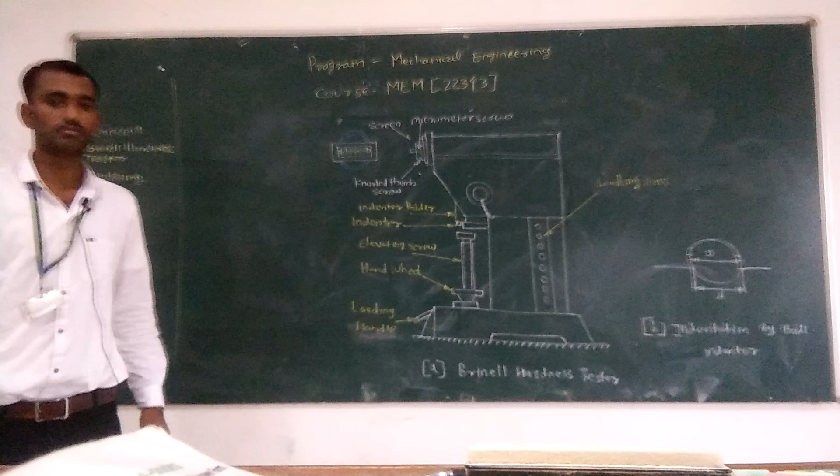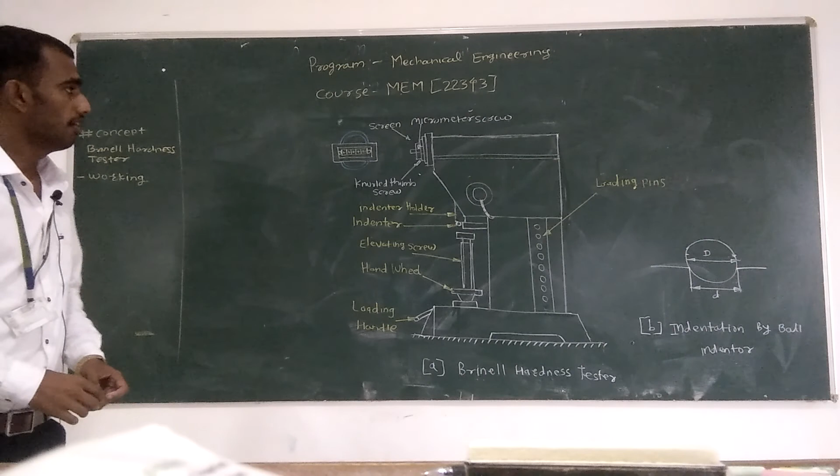In today's lecture, we are going to learn Brinell hardness tester and their working. As we know, there is one important property, that is hardness, which is a mechanical property. So, what is hardness? Hardness is nothing but a resistance of the material to penetration.

Means if you are going to conduct the hardness test, some indentations are created by using balls. So resistance to that penetration is nothing but hardness.

So what we are going to do in hardness test, a tool with particular geometry with mechanical properties is enforced in the surface of the specimen, which is either circular or conical, spherical in shape.

Suppose this ball is impacted on the surface of the specimen, then it will create some indentation on the specimen, and by measuring the diameter of that indentation, we can measure the hardness.

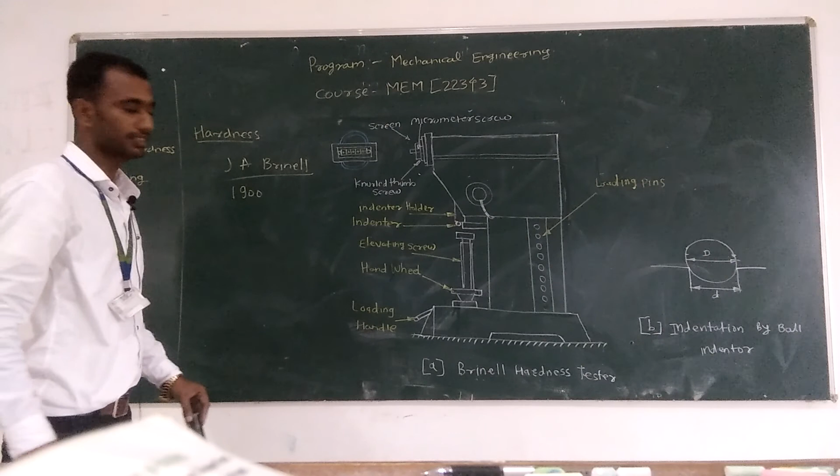According to this scientist, we are going to use the ball of materials steel, hardened steel, or carbide, having dimension 10 mm in diameter. The material of the indenter is made up of hardened steel or carbide, and diameter of that indenter is 10 mm.

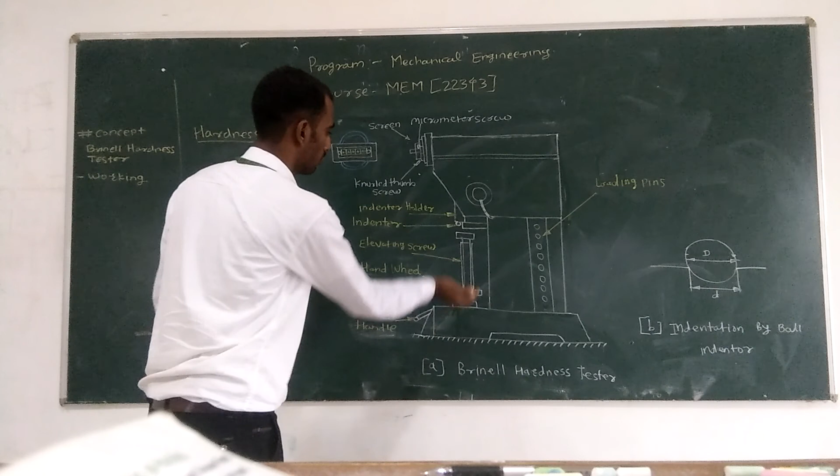Next procedure is that by using this loading handle, we can apply the load or adjust this arrangement, and lift the specimen in upward direction. Now, the load is applied hydraulically or by using mechanical devices. We can use them and apply the load on the surface of the specimen.

Now, after applying the load, we get an impact on the surface of the specimen in terms of indentation like this. This is just because of impact of the bottom surface of that indenter. Suppose this is the diameter of that indenter, capital D, and the impact diameter is taken as small d.

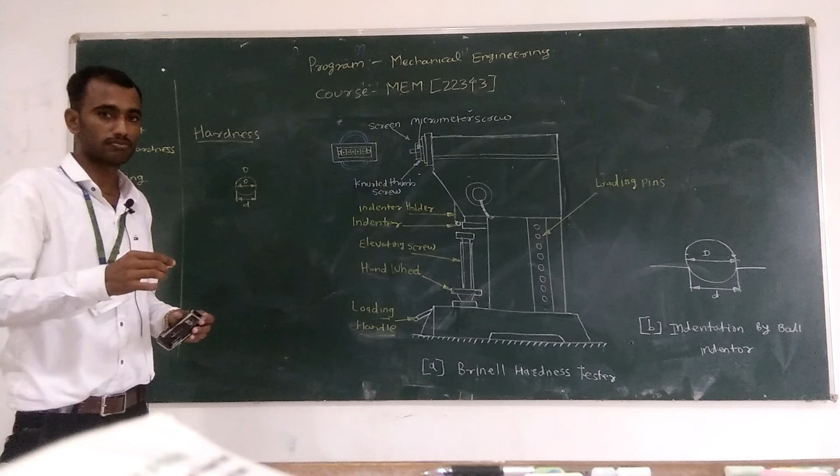Now, the hardness of that specimen can be measured by a mathematical formula. That is BHN equals applied load P divided by (πD/2)(D minus the square root of D squared minus d squared), where BHN is nothing but Brinell hardness number.

This is the unit of hardness. P is applied load in kilogram. And this is area, and the area is in millimeter square.

So, where capital D is equal to the diameter of the ball indenter, small d is the indentation dimension. After the impact, whatever diameter is measured is denoted by small d. By putting in the value of the applied load as well as the diameter of the ball and the indentation diameter, we can calculate the Brinell hardness number, or hardness, of that particular specimen.

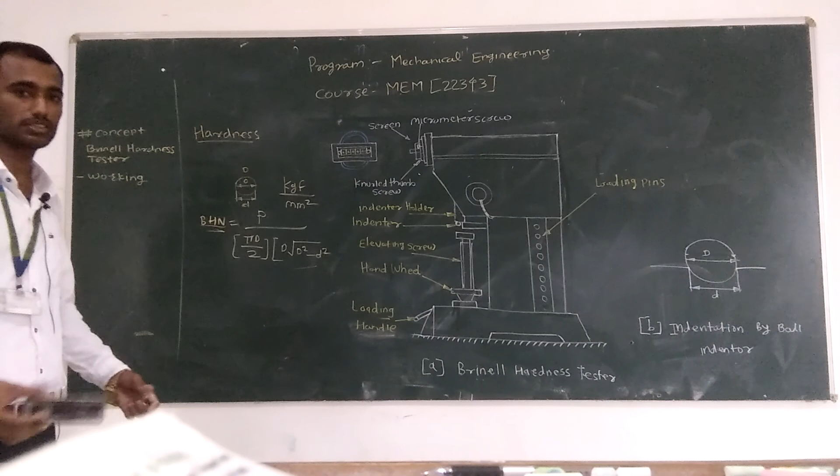This is all about the working of the Brinell hardness tester. Now, we are going to discuss the advantages and disadvantages of Brinell hardness testing.

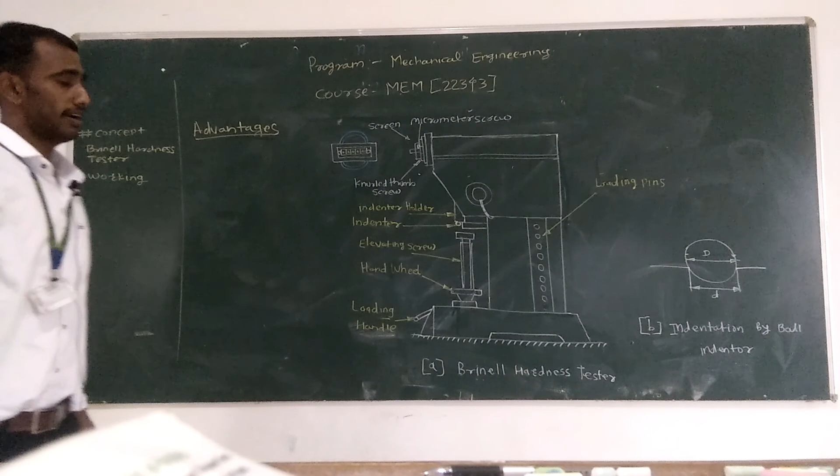As the diameter of the ball indenter is so large, that is 10 mm, and some materials have heterogeneous compositions, their hardness changes from point to point. Suppose this is a specimen, and we consider points on the surface: 1, 2, 3, 4. Suppose this is a heterogeneous specimen; because of that heterogeneous composition, the hardness of the specimen will vary from point to point.

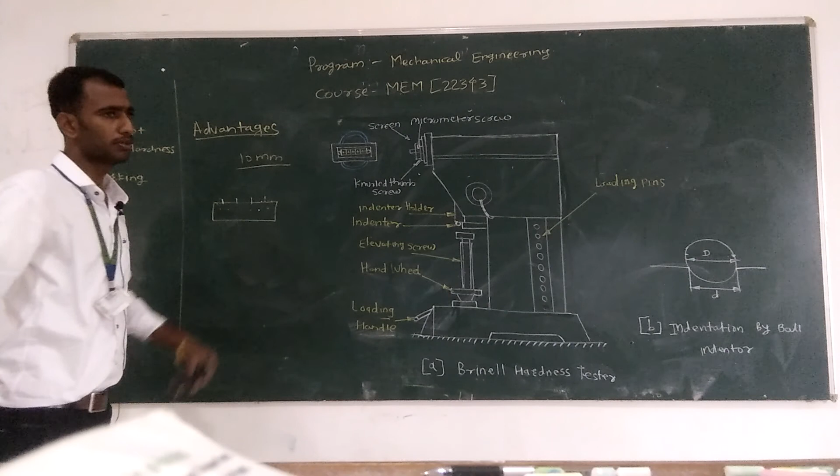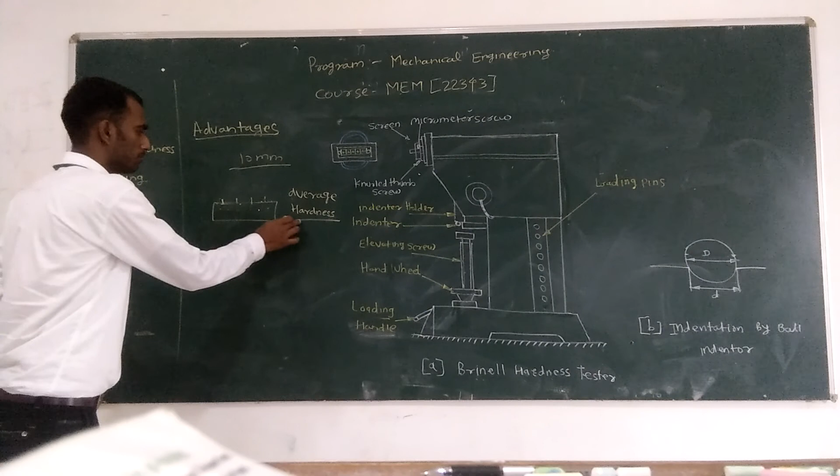So, because of the large diameter of the indenter, whatever hardness is calculated by that indenter is the average hardness. That means there is no impact on the accuracy of the hardness measurement. Even if the hardness changes from point to point, there will be no impact. This is the advantage of the Brinell hardness test.

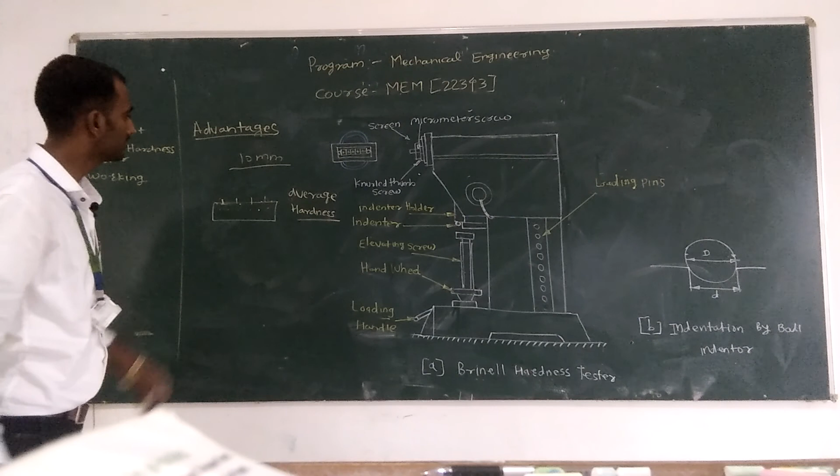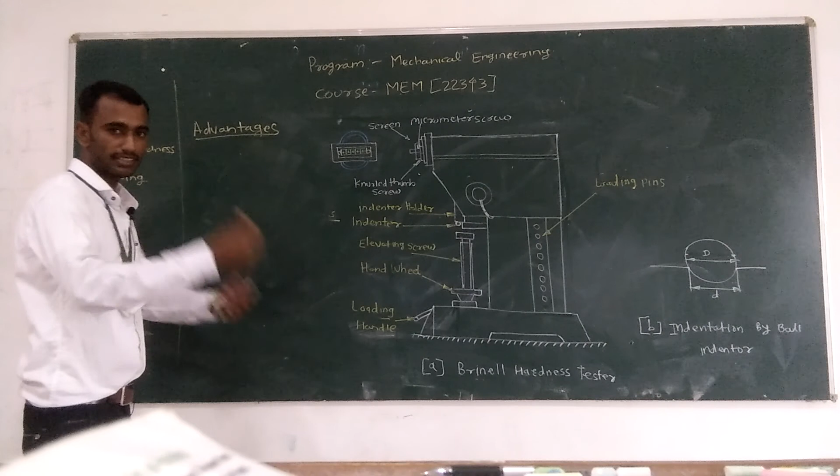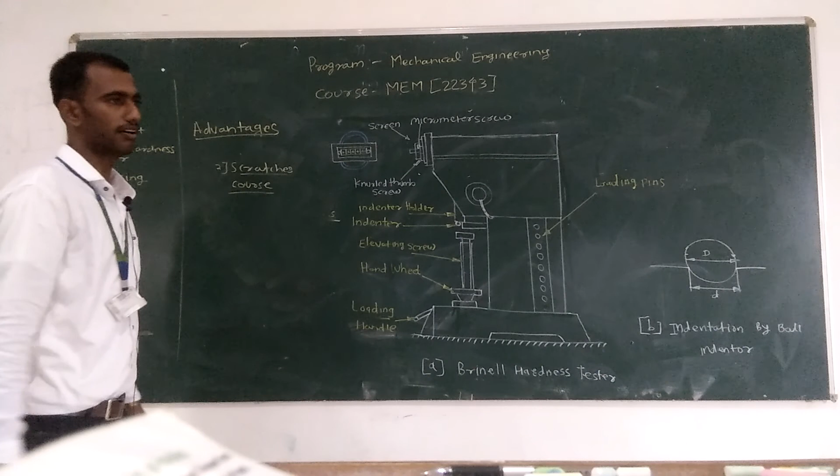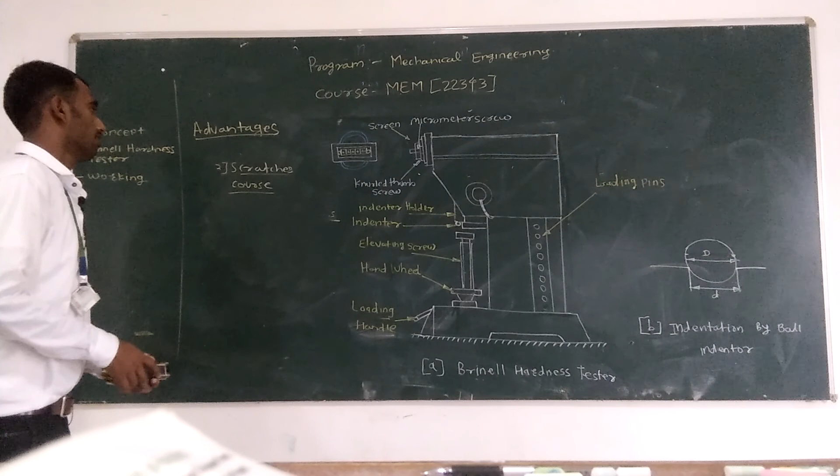Also, the second advantage of the Brinell hardness test is that if there are scratches present on the surface, or a coarse surface, it will not impact the accuracy of the measurement. So this is the advantage of the Brinell hardness test. Now we are going to discuss the disadvantages of the Brinell hardness test.

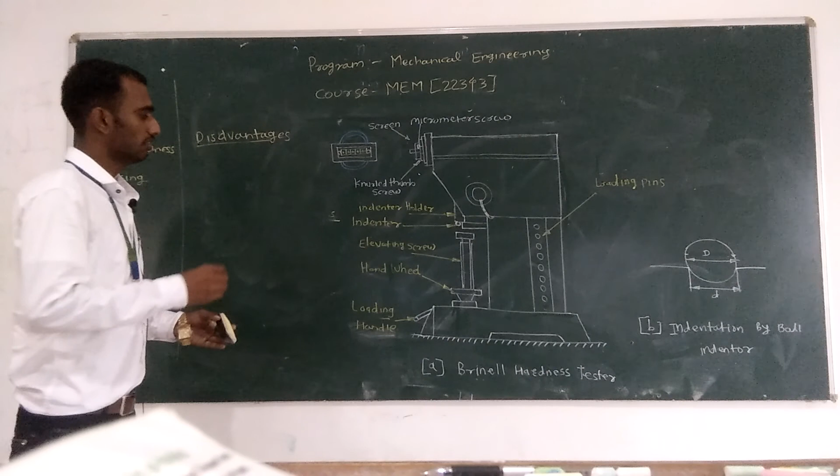We are going to use an indenter made of steel. As we know, steel is a soft material compared to some other materials. So if you are going to measure the hardness of materials harder than steel, we can't get the actual dimension, meaning the accuracy of that particular test will be affected. This is a disadvantage of the Brinell hardness test.

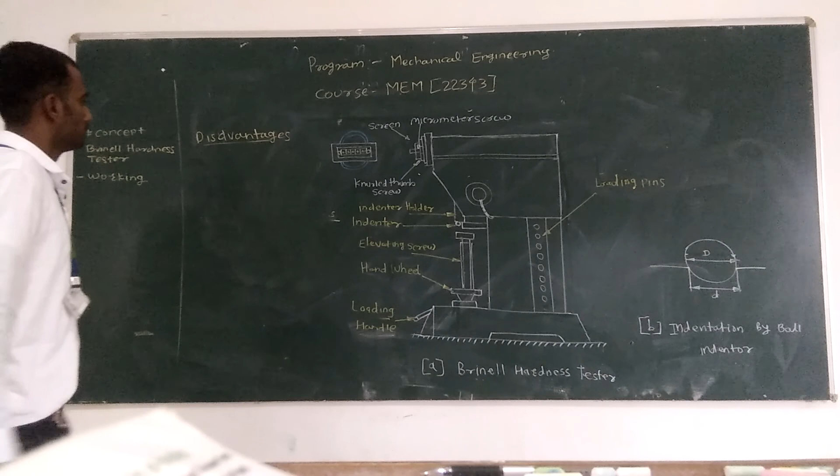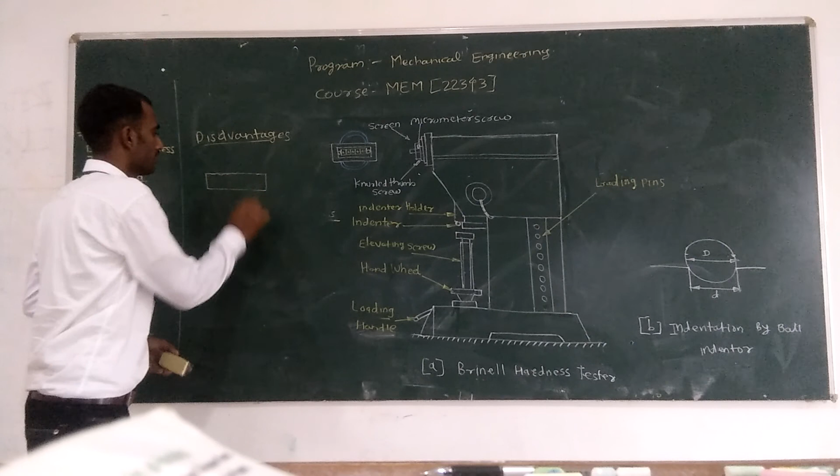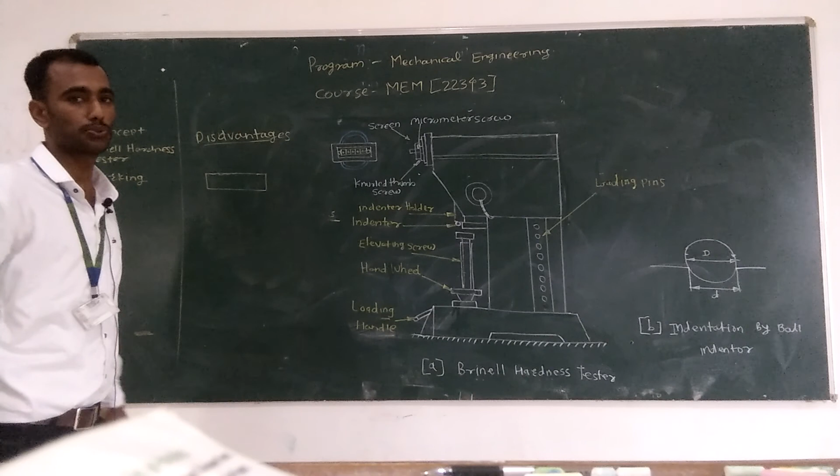The next disadvantage is local deformation of the specimen. Suppose this is a specimen; sometimes it gets local deformation. So the accuracy of the Brinell hardness test is affected in two ways. What are the two ways? The first one is ridging and the second one is sinking.

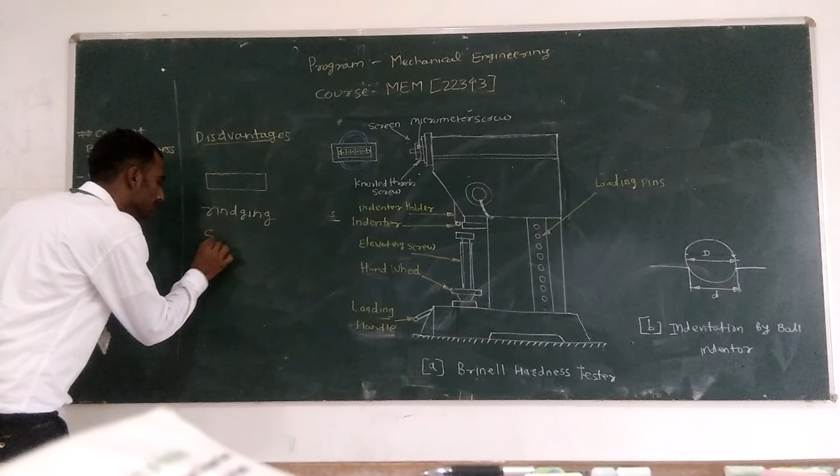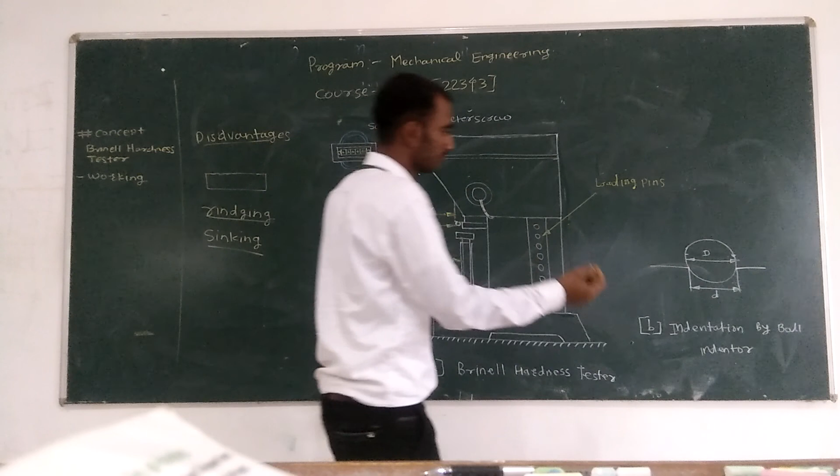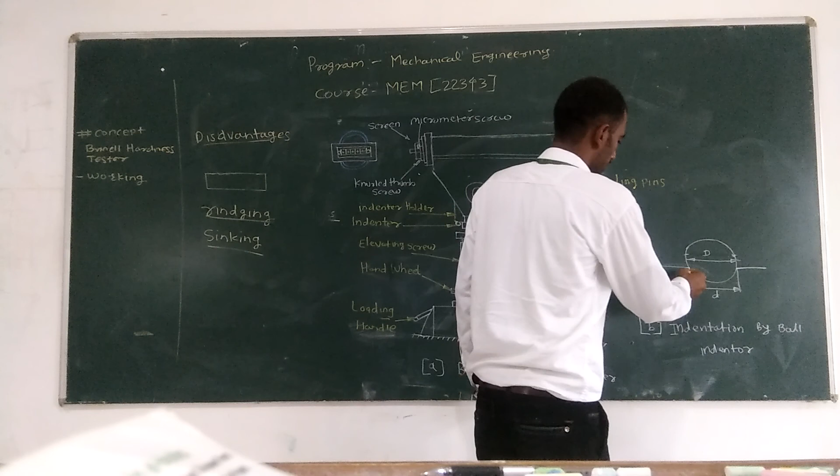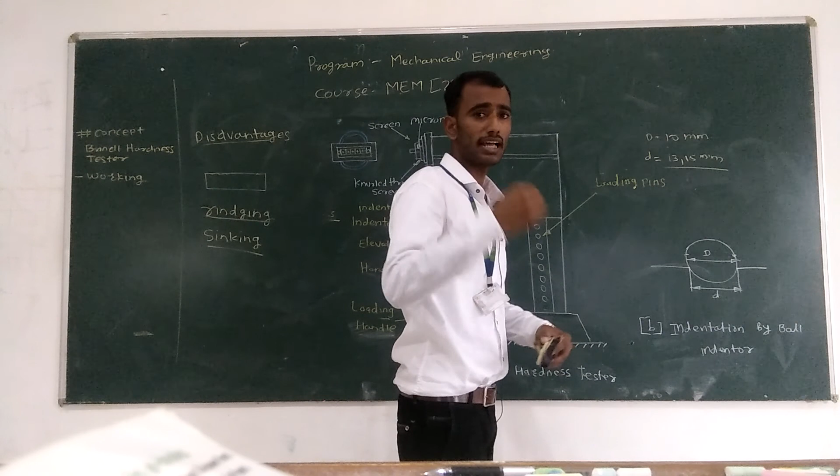Ridging means that, because of local deformation, the indentation is much greater than the actual dimension. Suppose the diameter of the indenter is 10 mm. Because of local deformation of the specimen surface, you get an indentation diameter greater than 10, that is 13 or 15 mm. That means the accuracy of our test is affected, and this is called the ridging effect.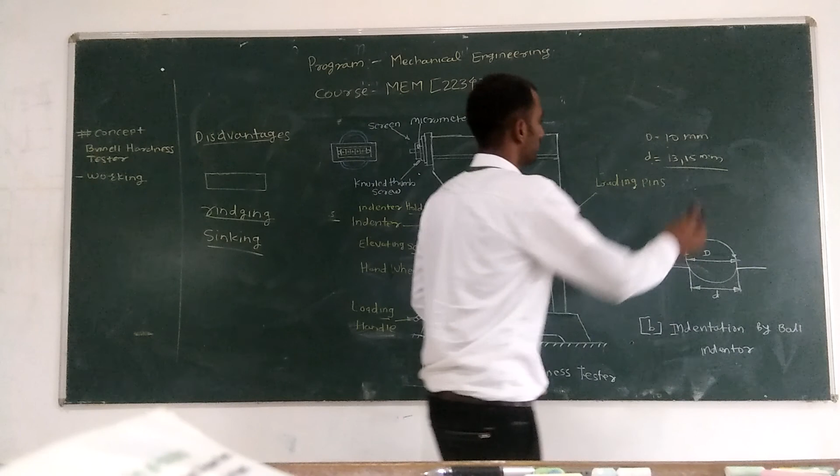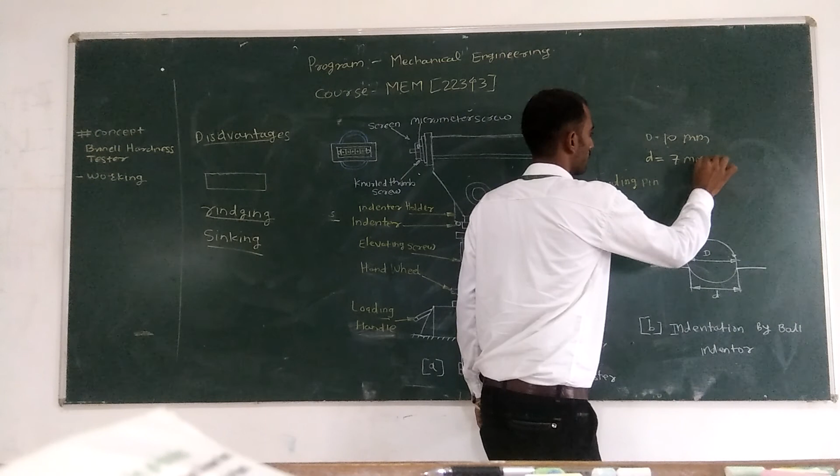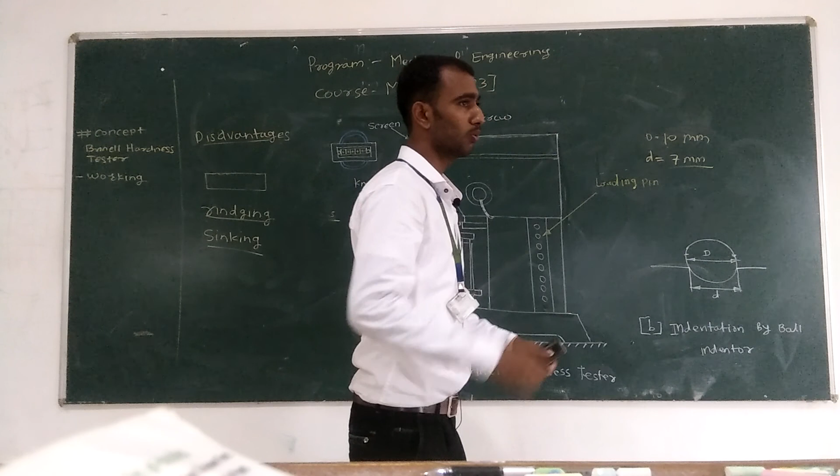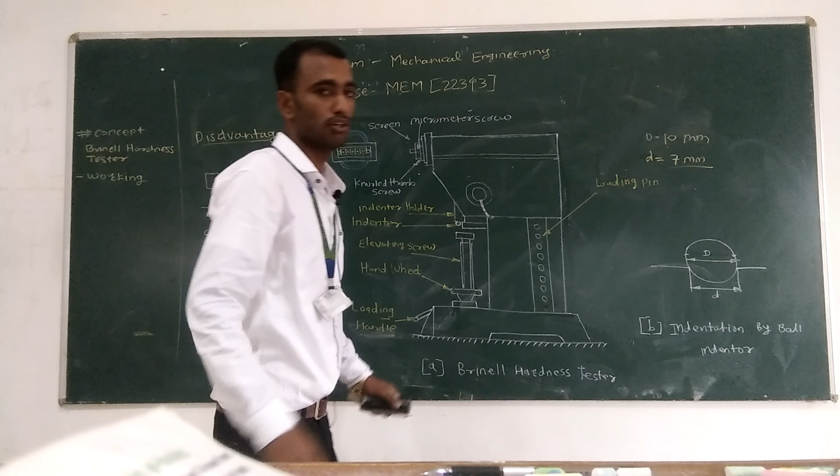In a similar way, the second effect: suppose the diameter of the indenter is 10 mm and we get an indentation reading of 7 mm, which is smaller than the actual reading. This is because of local deformation, and it is called sinking. In this way, the accuracy of the Brinell hardness test is affected. That is a major disadvantage, and it occurs due to local deformation of the specimen surface.

In the next lecture, we are going to learn the Rockwell hardness test.